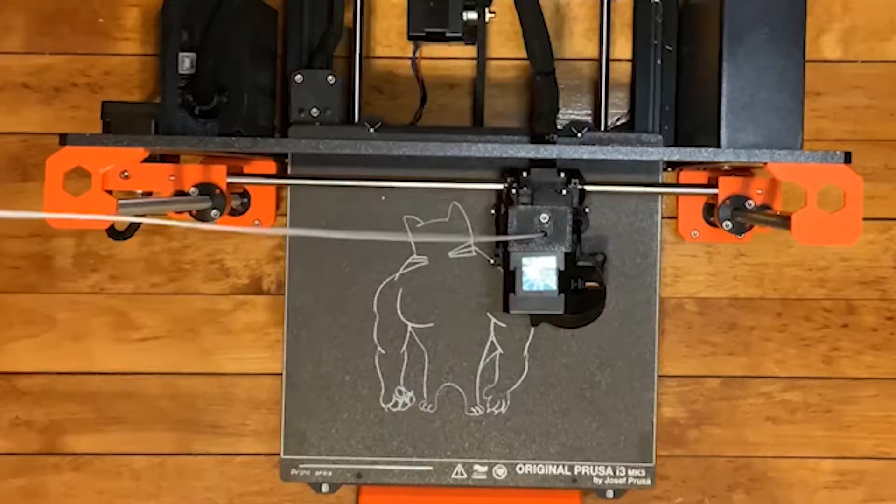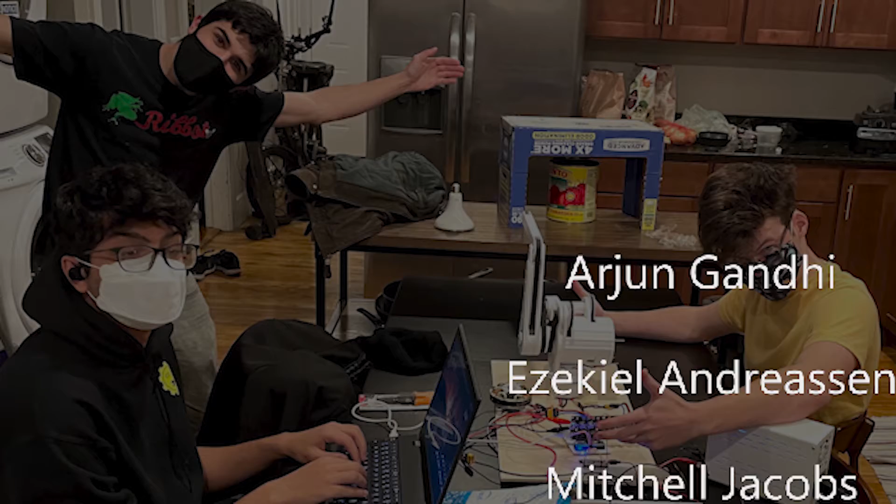Our MQP team wanted to be ambitious and throw ourselves into our capstone project. Needing funding to fuel our ambition, we knew the Tinkerbox Award was a perfect fit. Winning the award allowed us to expand the scope and depth of our project.

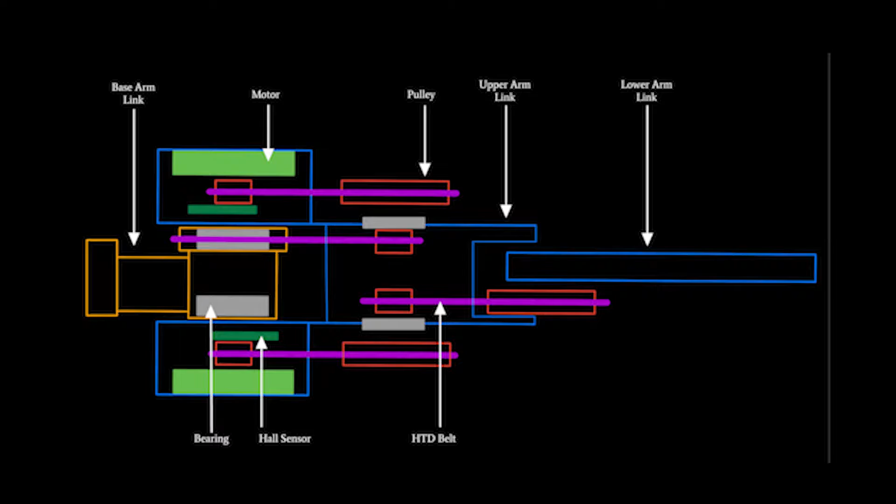The amount of development seemed overwhelming, but the Tinkerbox mentors provided guidance and encouragement that allowed us to take full advantage of our funding and time. Although we are still only in the first semester of our project, we are ecstatic with the progress we have made thus far. Here is our project.

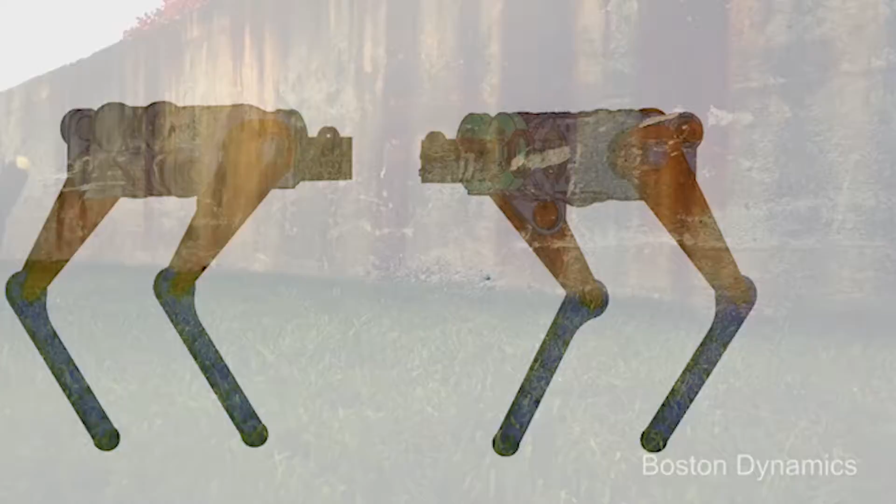The demand for robots is moving from specialized robots in controlled environments to generalized robots in unstructured environments. In a world designed for legged creatures, wheels limit where robots can go. This realization has led several universities and companies racing to produce high-performing quadrupeds.

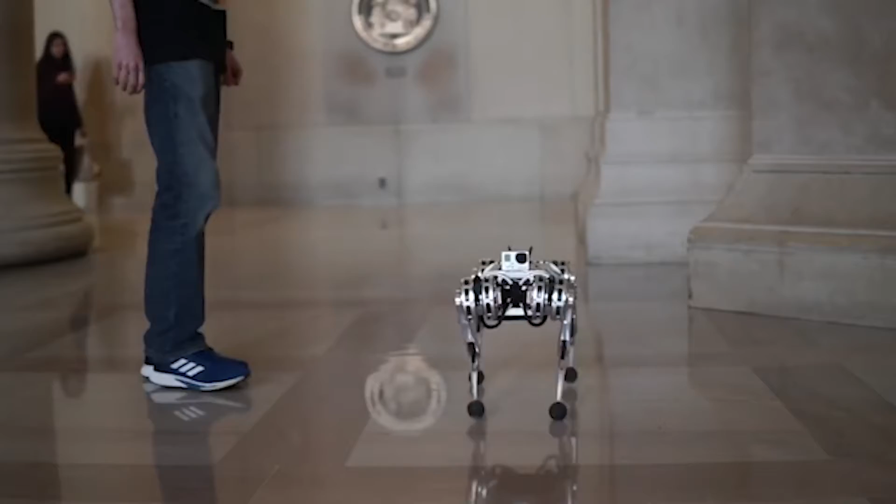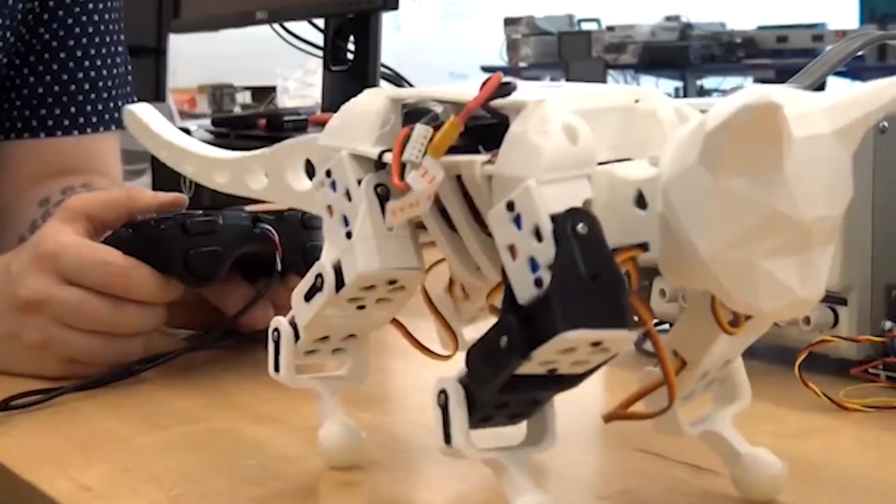Previous WPI quadrupeds have not had access to the components they need to be successful, either because of their tight budgets or technology available at the time. Deficiencies in powertrains, materials, and sensors prevented projects from achieving a power density and level of control necessary to perform dynamic movements.

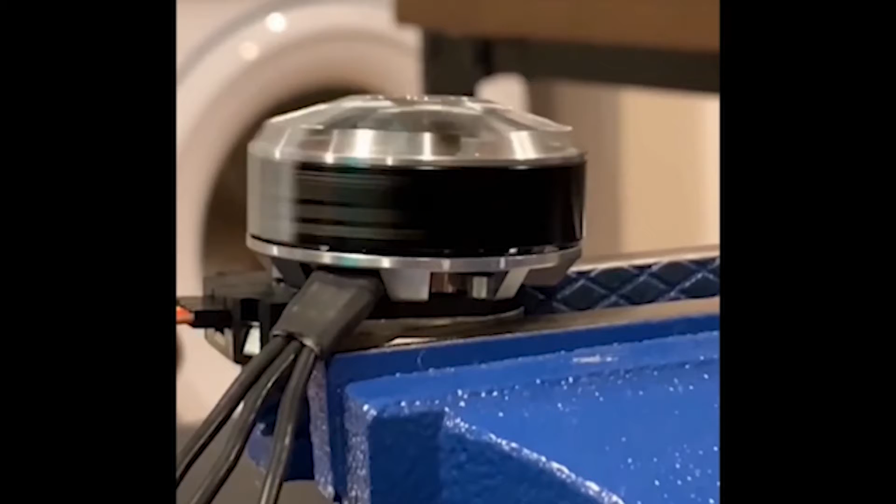The core technology that would allow for our increased power and control are advanced modern brushless motor controllers that enable high-powered brushless motors to function like high-powered industrial servos. Only recently have these controllers come down in price. One such controller is the ODrive, a popular open-source controller among robotics and quadruped communities. This controller is the basis of our quadruped.

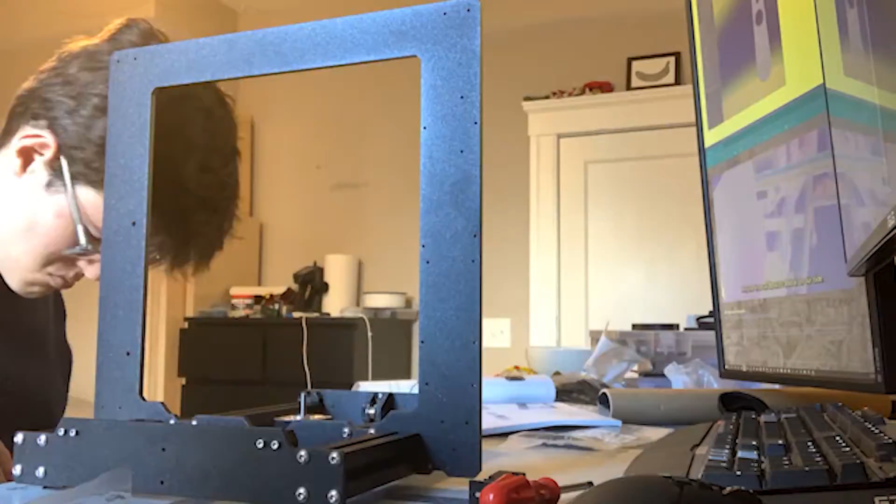Tinkerbox mentorship gave us insight and direction, helping us set and achieve goals. At their suggestion, we started with development of a single arm. This allowed for rapid testing of code, mechanical design, sensors, and microcontrollers.

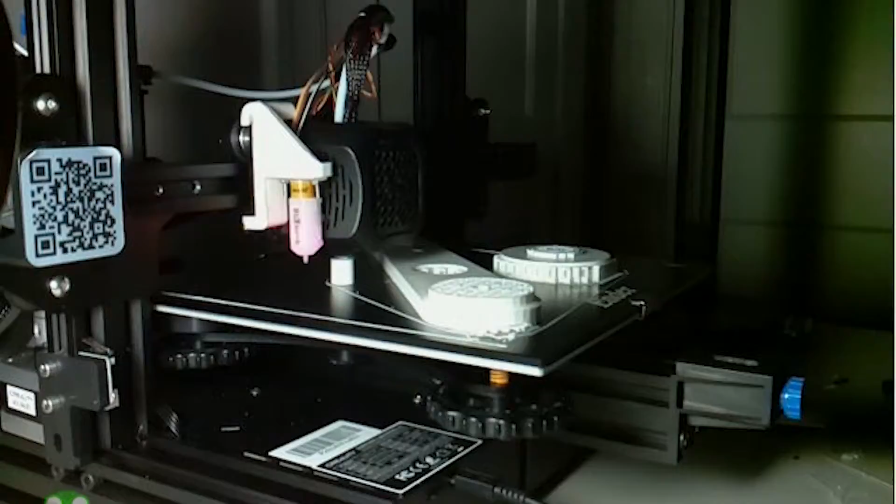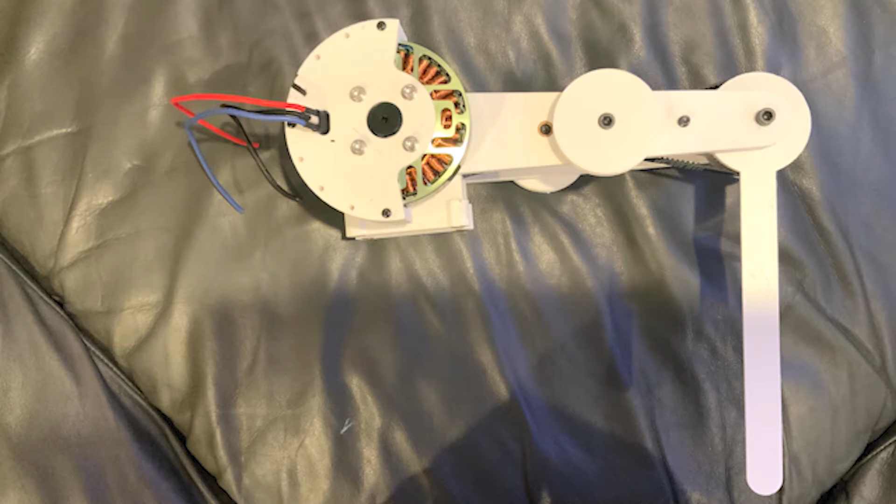We learned the most from arm version 1.0. We determined several weaknesses in the layout of components. The motor wires were an afterthought and were extremely susceptible to being tangled and yanked. The geometry of this version would have also limited the quadruped's flexibility. In the process of testing an encoder development board, we discovered numerous issues with the ODrive software.

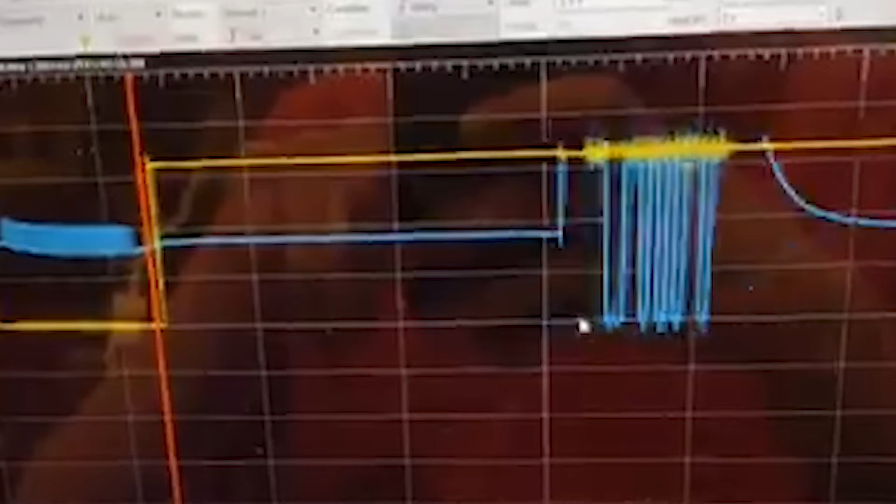The second iteration of the arm sacrificed mechanical simplicity for the sake of wiring and removing the end stops that plagued the first version. We designed and ordered circuit boards for the encoders for the motors, doing the same for the larger electronics to simplify wiring and reduce weight.

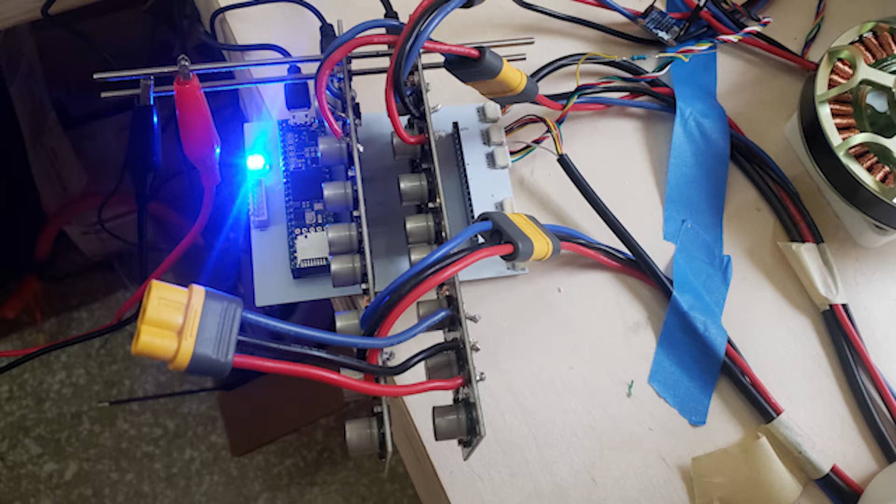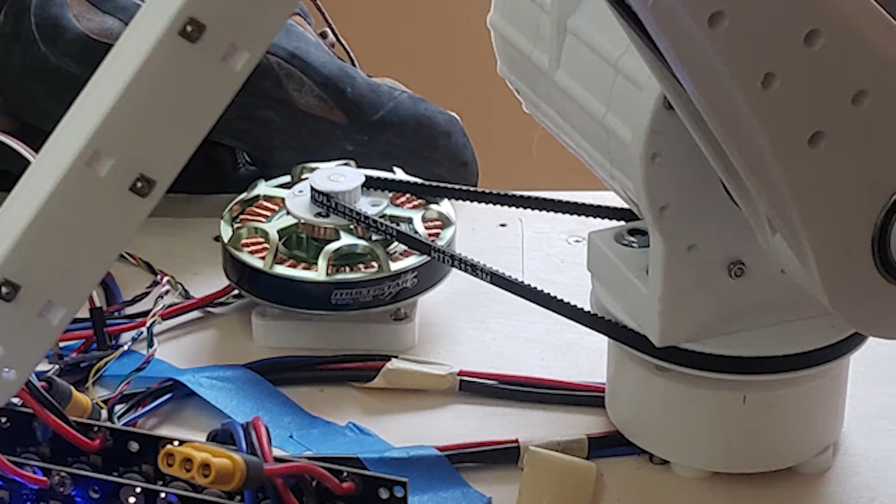The motor controller at the core of the project is open source. Due to the number of amateur contributors, the controller has deep-rooted inefficiencies and often behaves unpredictably. Without time to test alternatives, we worked around its deficiencies and pressed on.

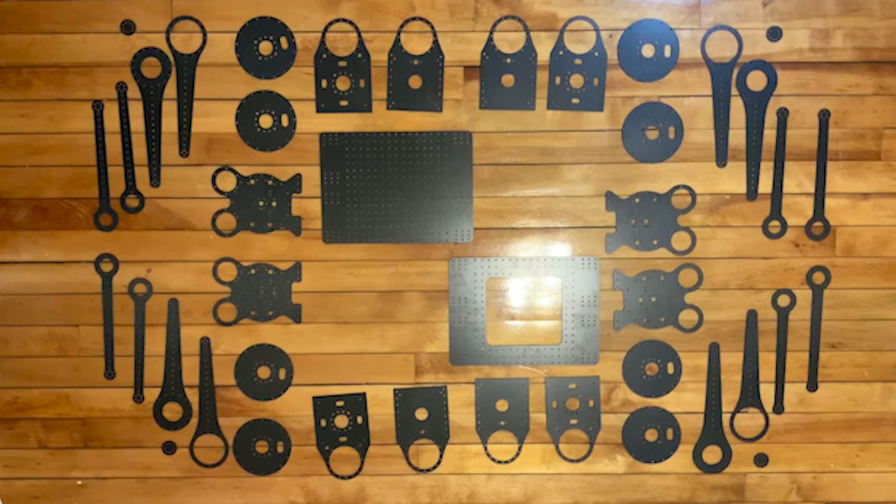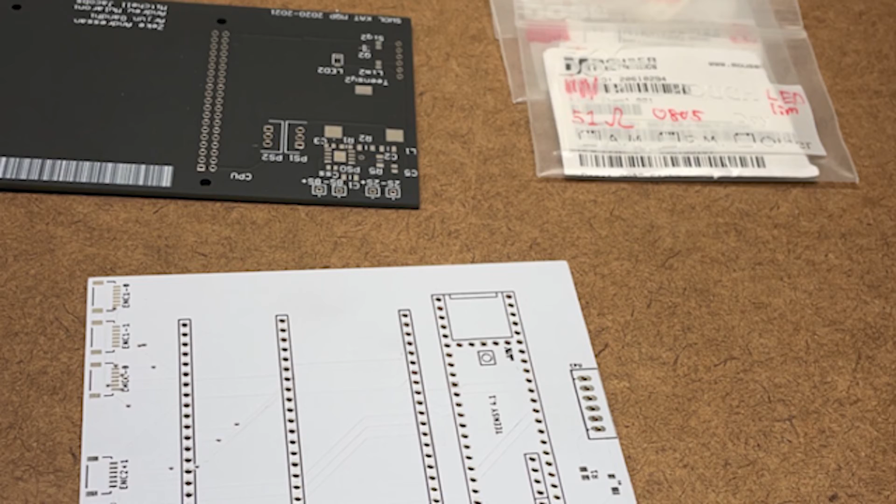To fix rigidity and strength issues for the final assembly, we calculated specifications for each of the mechanical components and ordered over 50 machined carbon fiber parts. Attempting to wire each arm to the master controller proved problematic. The microcontroller between the motor controller and master controller had become a bottleneck. Removing it, the ODrive is now connected directly to the main controller.

With our finalized arm, we look forward to assembling and programming our dynamically capable quadruped. Thanks to Tinkerbox, we were able to prototype, test, and iterate quickly. Even if funding hadn't been a concern, without the mentors and community's advice and support, we would not have had the direction and motivation to do all we had.